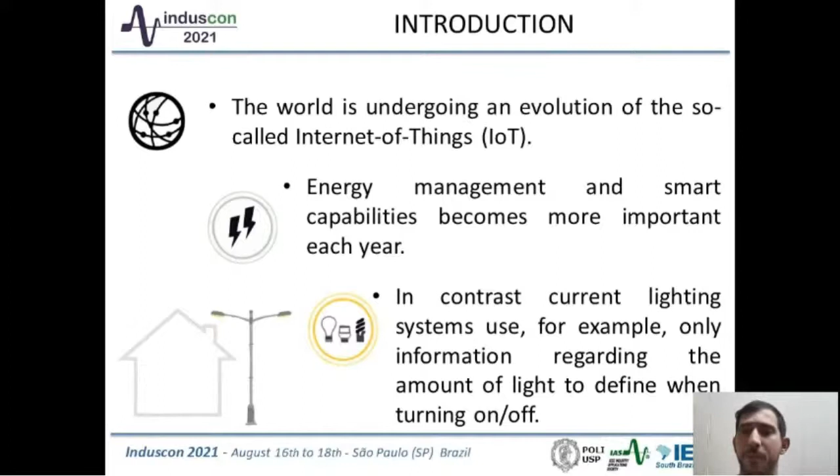In the current scenario, turning on and off public lamps happens based only on the amount of light detected by a sensor. An intelligent system can allow public lighting to implement more complex strategies, such as brightness control. In this work, a low-cost intelligent module to be integrated with public lighting is presented and evaluated from technical and economical standpoints. A low-cost hardware capable of allowing the operation of a single lamppost is presented along with its software implementation. The module will read the environment lighting condition, such as humidity, temperature, and also the current and the voltage from the light bulb.

This information will be used later in the software implementation to determine whether to change brightness from the light bulb.

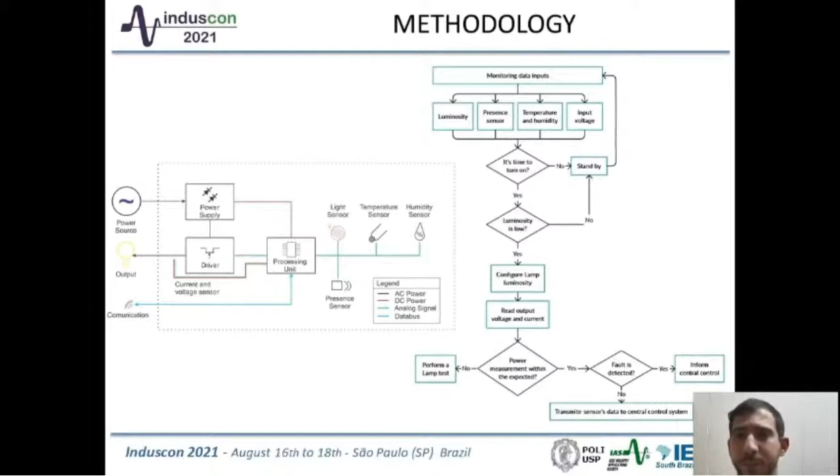Authors evaluate the module feasibility by estimating the maximum amount of power possible that can still provide positive returns.

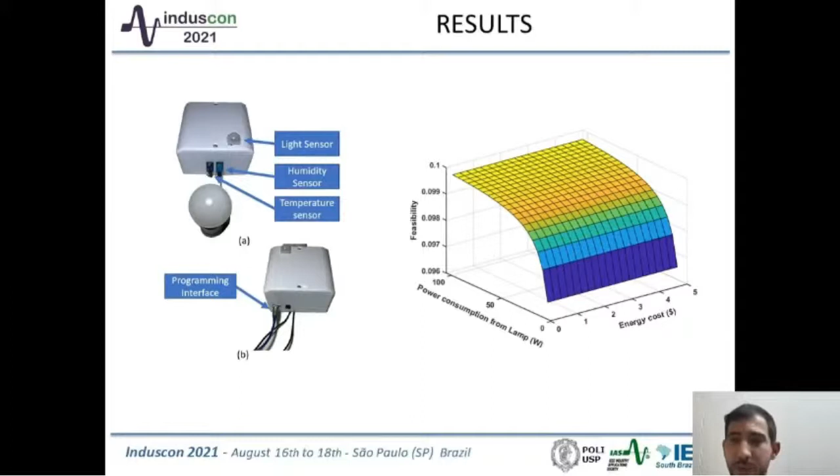The module's economic evaluation was performed based on three parameters: first, considering only the module installation; second, considering the retrofit of the module and the installation of a high-pressure sodium light bulb; and third, the retrofit of a mercury vapor light bulb and the module installation.

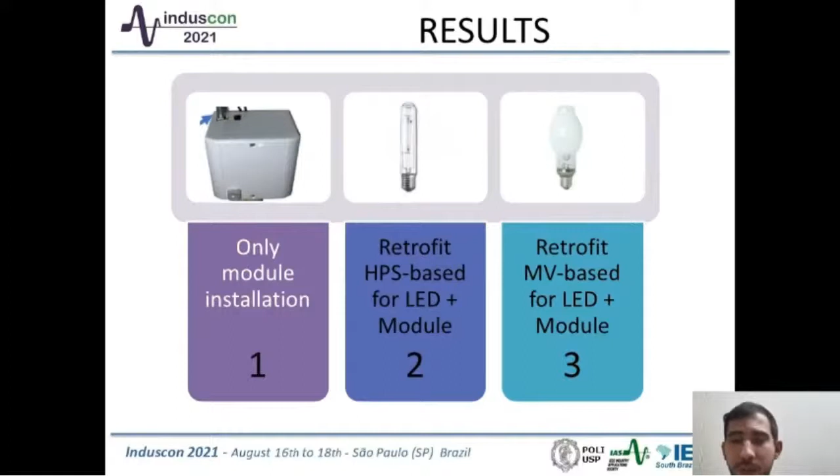Our results have shown viable economic return with a good payback time. These results allow the authors to conclude the module's viability, and in the future, authors intend to evaluate the labor and installation costs, as well as more complex dimming strategies based on pedestrian and vehicle traffic. Authors are available for any doubt, and contact information can be found at the link. Thank you.

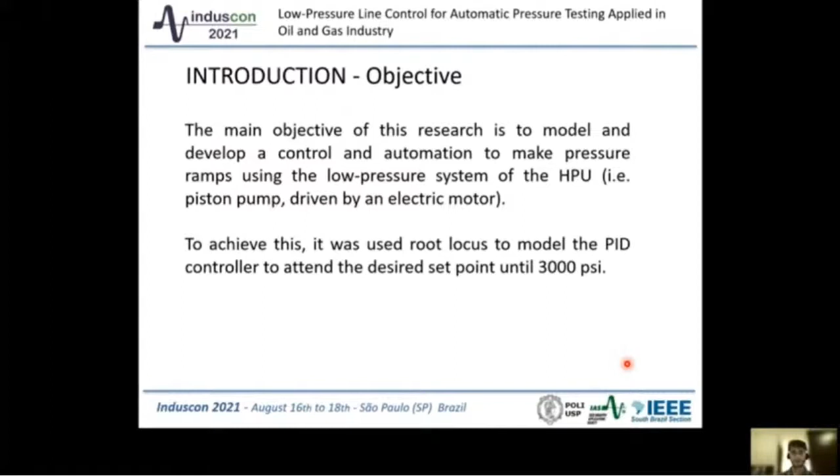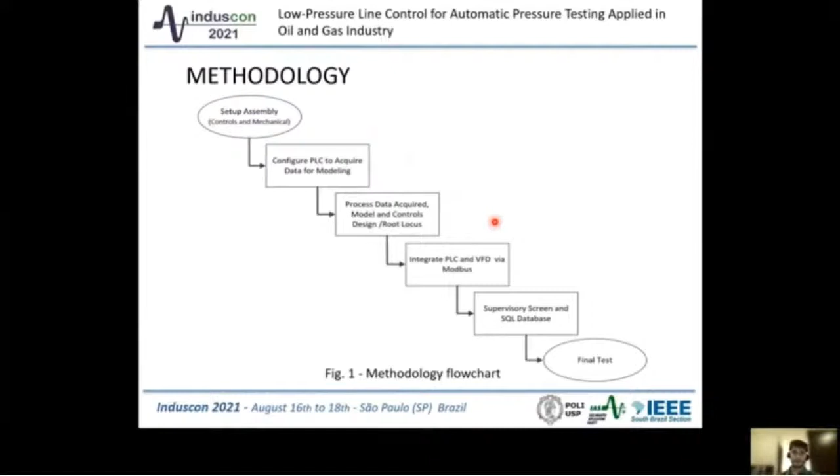To achieve that, we used root locus to model the PID controller. The overall idea is to set up the assembly, mechanical and control parts, understand the system, extract a mathematical model from acquired data, and then configure the PLC, VFD, and supervisor to finally run the final test.

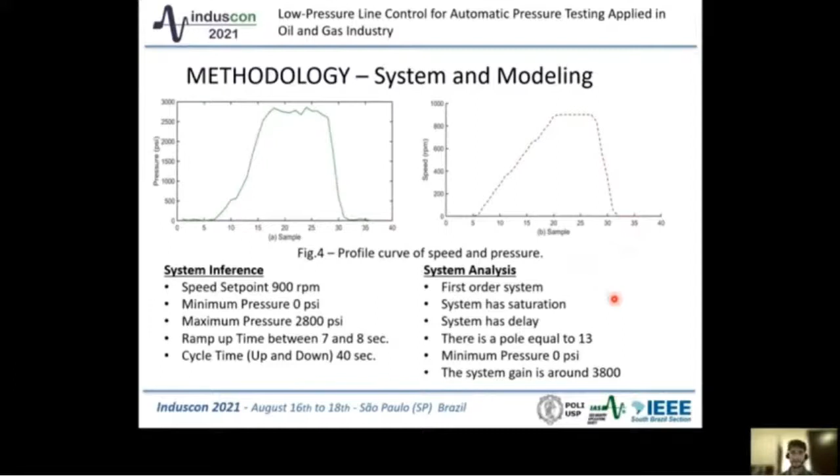In this part, we can see the pre-test to model the system, where we acquired a profile curve for pressure and a profile curve for speed, then made some analysis to understand and conclude some points, such as: it is a first order system, the system has saturation, delay, and some estimated poles and gains.

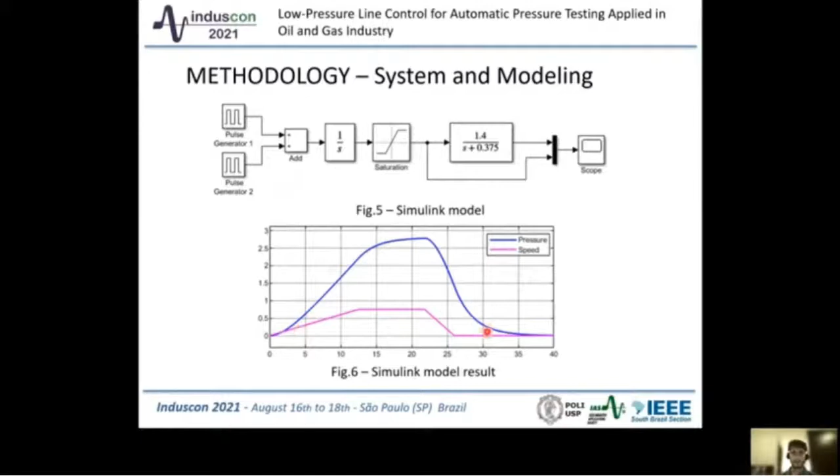After that, we set up and found this transfer function, and built this block diagram to simulate the model and check if the model matches reality. As you can see, the pressure in blue and the speed in purple are very similar to the real system.

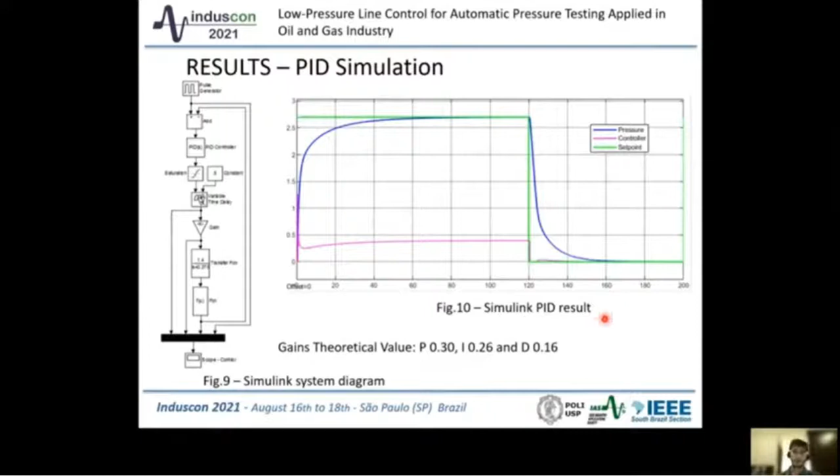During the simulations, to make sure our controller is good enough for the system, we used that model and configured our PID after root locus analysis, with P equals 0.3, I equals 0.26, and D equals 0.16. We have this response with pressure in blue, control signal in purple, and set point in green. It is good enough to be tested in the real system.

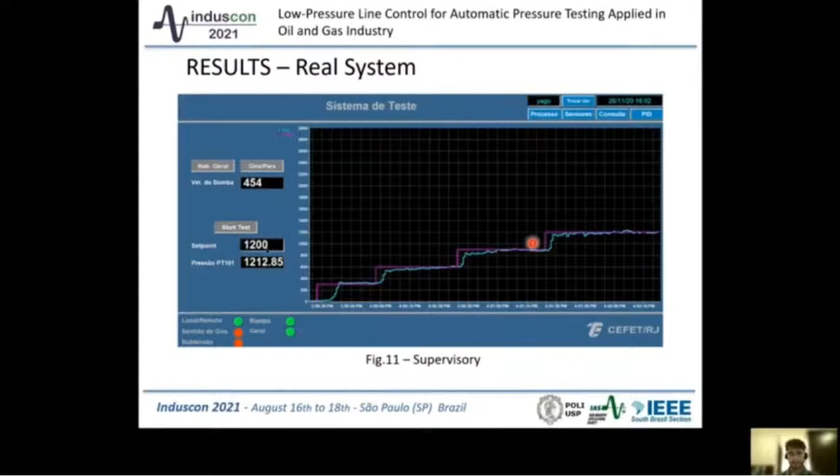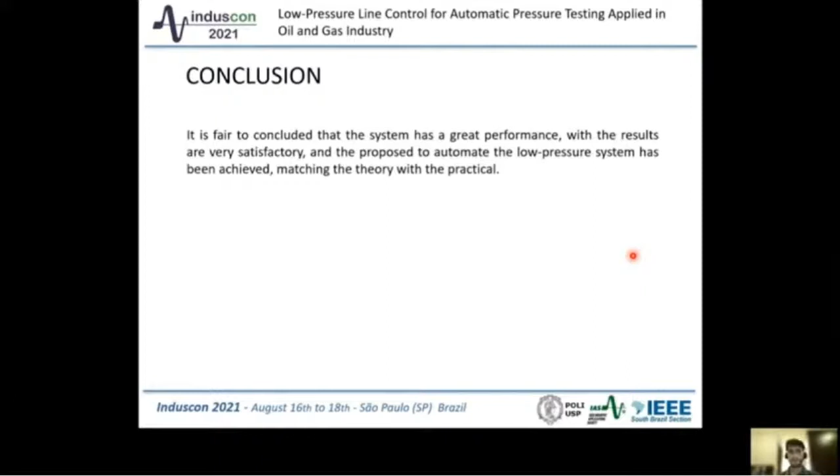It is fair to conclude that the system has great performance, with very satisfactory results, and the proposal to automate the low pressure line has been achieved, matching theory and practice. I would like to thank CEFET-RJ, CAPES, CNPq, and FAPERJ for supporting this work. Thank you all.

The consumption of contemporary society is based on the manufacture of products that need some industrial procedure to be obtained. This need for manufacturing has been present since the beginning of our organized societies, including the manufacture of artisans. The current production of goods and services is driven by phenomena such as demand for customized products, energy efficiency, environmental impact, carbon footprint, and others.

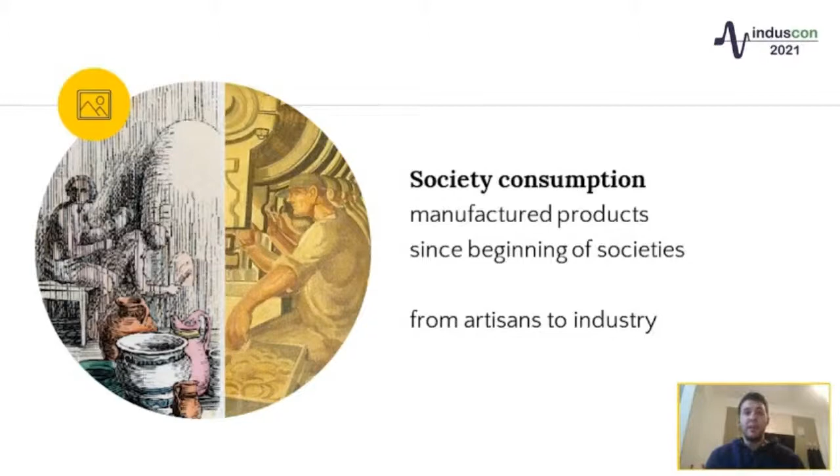In this scenario, Industry 4.0 appears to be spreading a new industrial archetype, marked by a new level of socio-technical interaction. Each small decentralized process in the factory is self-controlled and capable of responding to different situations autonomously.

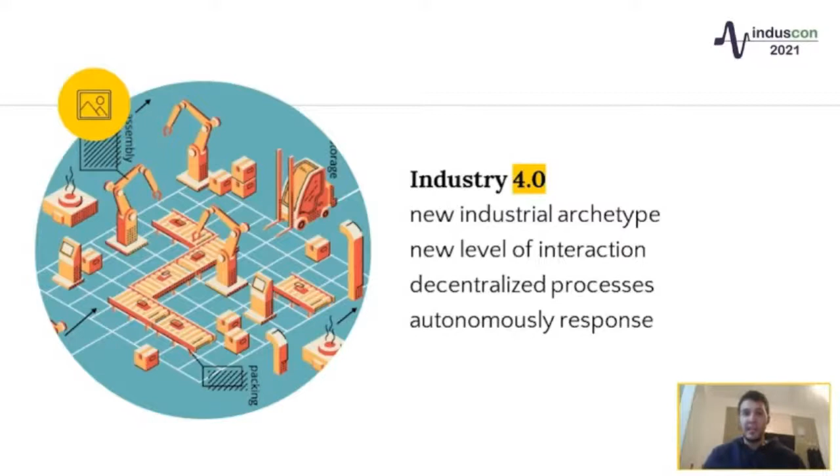This article wants to show a case study of interoperability between AGV systems in a real production line and its corresponding optimization. For the development of this project, research was carried out to understand the automation process of a production line of a large company in the automotive sector, with great performance in the truck industry in Brazil.

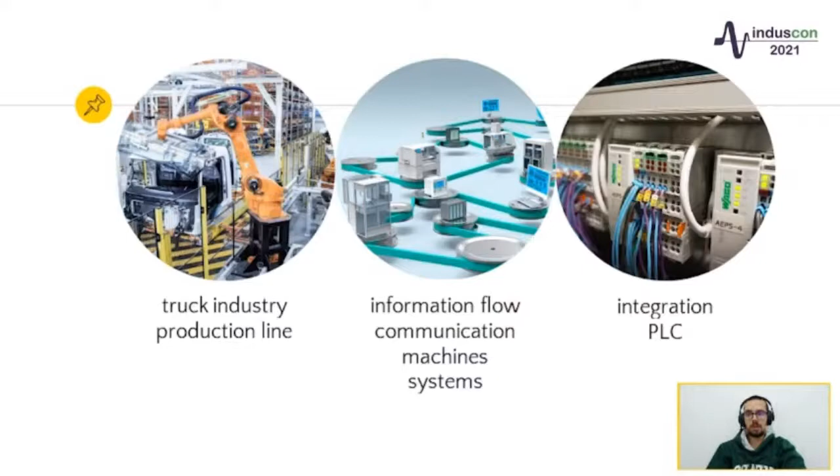The research was aimed at simulating how an integration of autonomous systems would occur within the manufacturing process, in addition to understanding the needs of integrating systems in a production line with several automated systems, identifying how machines communicate and how they can be controlled through databases to perform simulations with the Programmable Logic Controller, or PLC.

Basically, what we did to elaborate this article is that we studied how a real production line works, what kind of systems it needs, and how the information flows into different equipment. We studied the different protocols and different data types that come from different types of machines from different companies, and we tried to put all this together in a virtual simulation environment and make this a tool so that we could study how to integrate all these systems and how it would work in a real-life system.

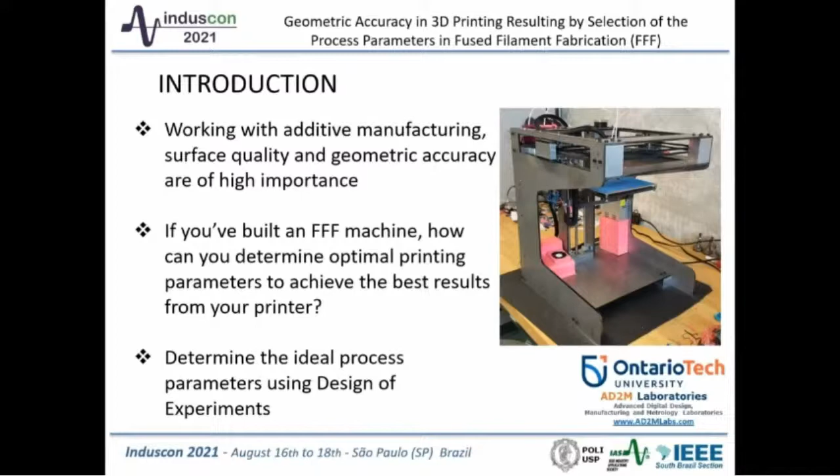So say you have a new 3D printer and you want to improve the surface quality and geometric accuracy of the parts coming off this printer. What's the best way of doing this? One of the ways you could do it, and the way we did it, was using design of experiments.

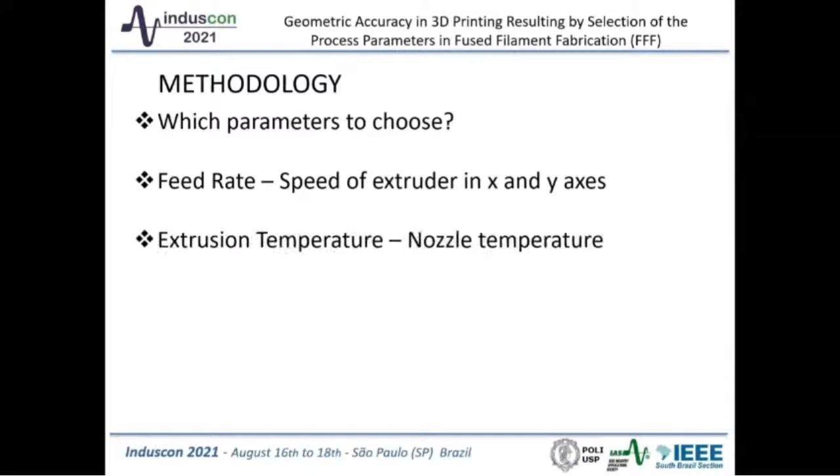So the first thing with this process is, which parameters do you want to modify? So we went with the feed rate, or the speed of the extruder, the extrusion temperature, the layer thickness, the infill, and the flow rate.

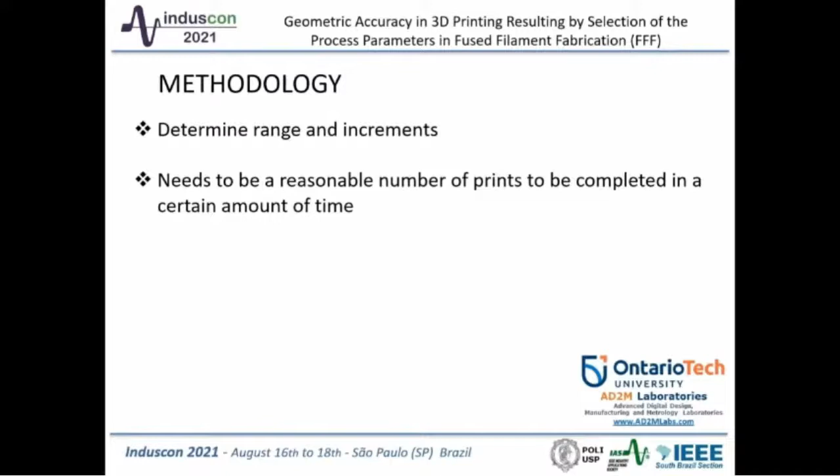Next, we want to figure out what the ranges and increments of these parameters are going to be. We need to make sure that we keep it to a reasonable number of prints, and it needs to be done in a relatively small amount of time. So here are the values we went with.

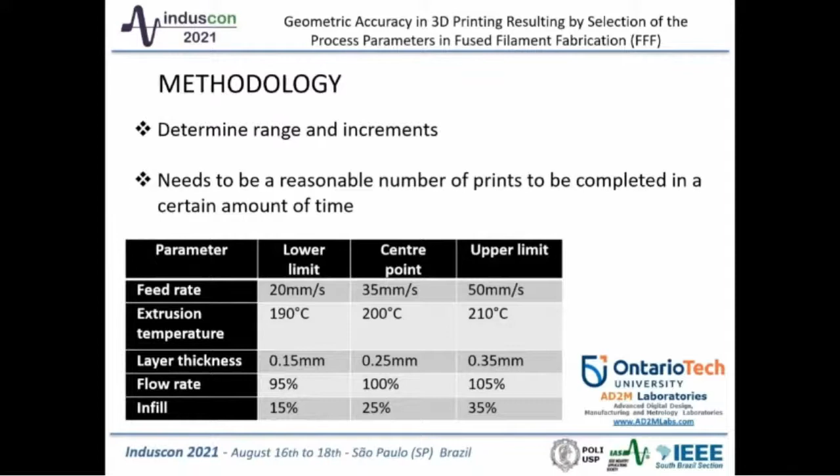We went with a lower limit and an upper limit. So these are going to be the only two values we use for all parameters, and then we're going to go through all permutations of those values. And finally, we have our center point. We're going to run 5 center point runs dispersed throughout the rest of the runs, just as an average point. Those will not be subjected to any permutation.

We also made 3 different test parts. So we have one for linear dimensions, circular dimensions, and angular dimensions.

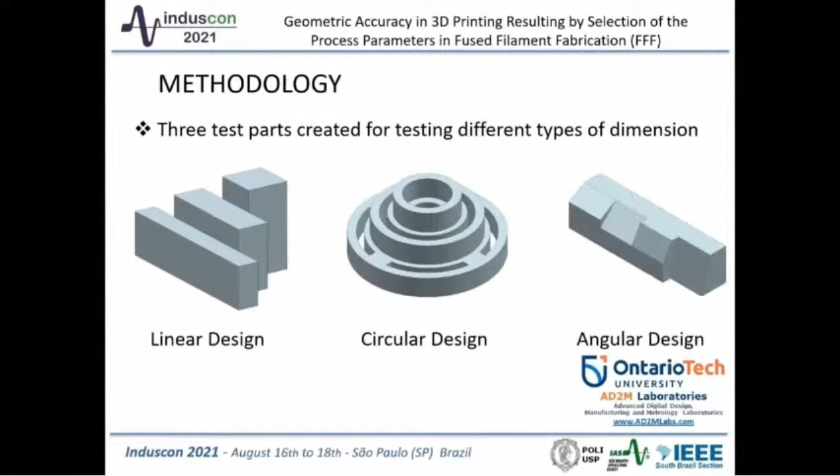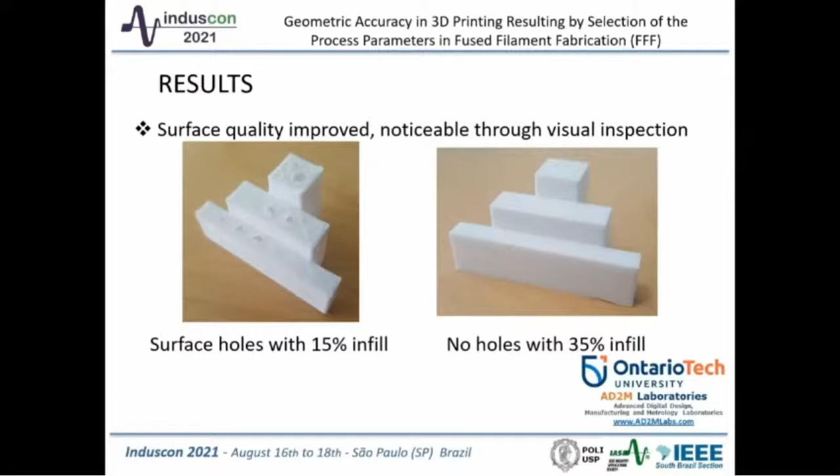So results: after this process, we had much improved surface quality. Just through visual inspection alone, it's very easy to see how improved things are. For example, with our 15% infill, regardless of other properties, we had these surface holes, which is just because the infill wasn't able to support the top layers. By increasing that to 35%, our upper limit, we now have much better top layers, and our surface quality is much better overall.

We also have these unoptimized parts here, which through optimization, we have far superior parts with much less inaccuracy. So before we had an average deviation of 0.35 millimeters for any specific dimension, afterwards a deviation of 0.08 millimeters on average. So a great improvement.

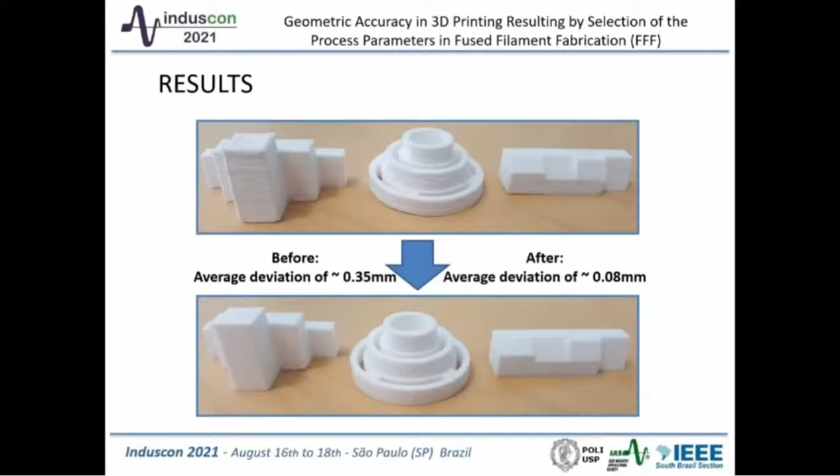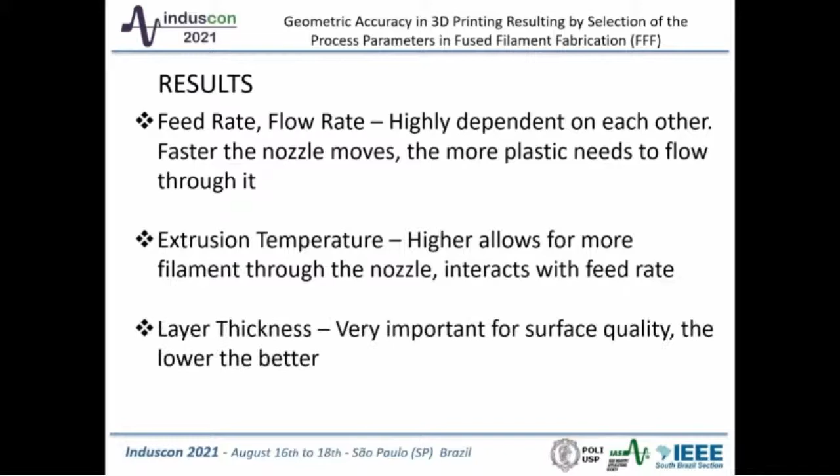Our layer thickness, which is well known, is very important for surface quality. The lower it is, the better, although it takes longer. And finally, the infill directly affects the quality of our top surfaces, as we saw a few slides ago.

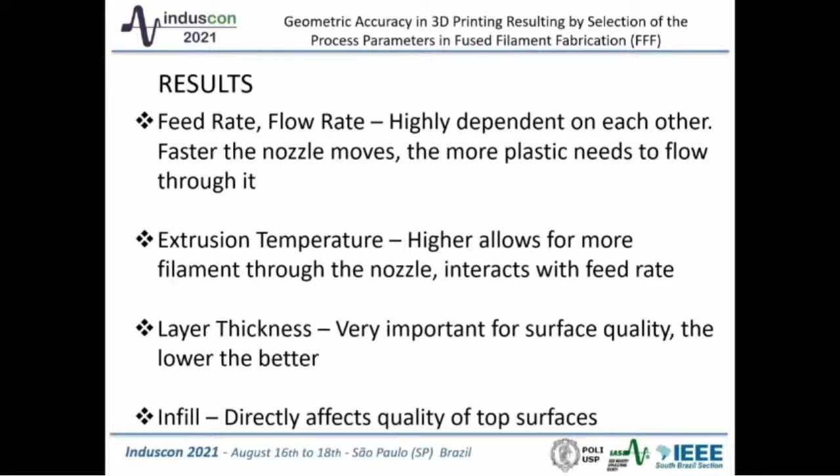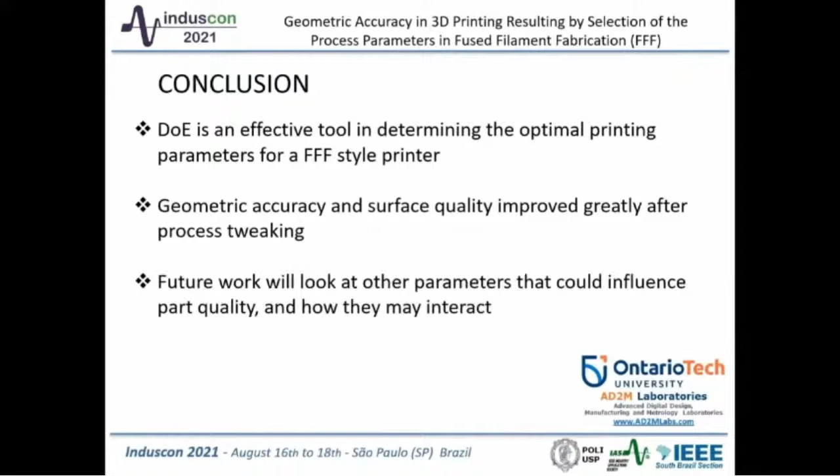So in conclusion, DOE is an effective tool for determining these kinds of parameters. Geometric accuracy and surface quality were improved greatly on our printer after our process tweaks. And in the future, we're going to look at how other parameters could influence part quality and how those may interact. Thank you.

My name is Guilherme Hollweg. I'll present a short presentation of the paper entitled Discrete RMRAC Super-Twisting Sliding Mode Structure for Current Regulation of Single-Phase Grid-Tied Converters with LCL Filter.

The proposed controller is for current regulation of single-phase grid-tied converters with LCL filter. We combine two structures, RMRAC and super-twisting sliding mode, and we obtain results in PSIM, in software simulation, comparing its performance with a proportional resonant controller, a classical controller, and RMRAC with an adaptive first-order sliding mode controller.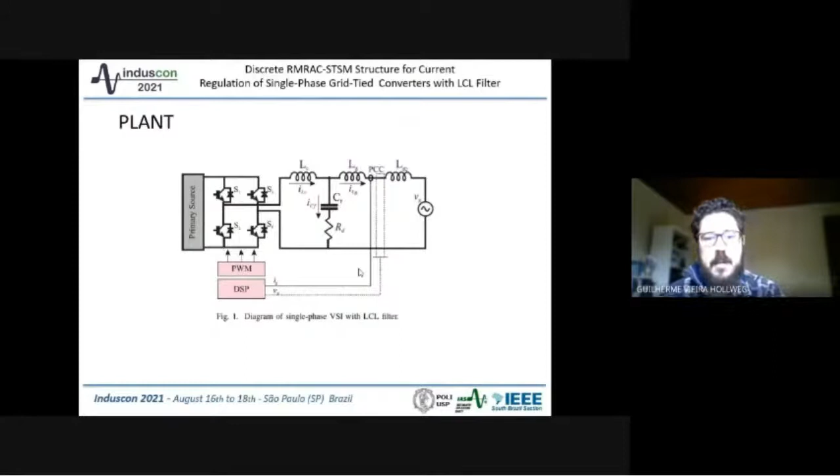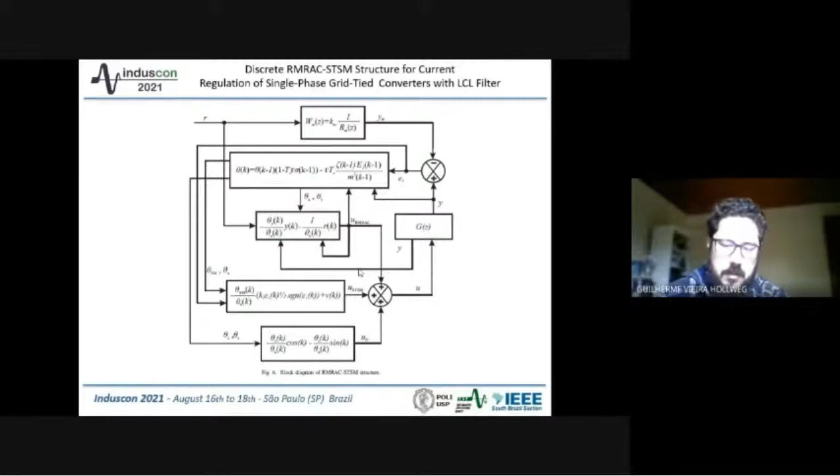This is the plant, LCL single-phase with a voltage source inverter. This is the complete general block diagram with the control signal, the control flow of the system, the proposed controller. We have the model reference, the plant, the recursive algorithm, and the control actions. The complete control action is composed by the sum of RMRAC, super-twisting, and the electrical grid as a periodic disturbance.

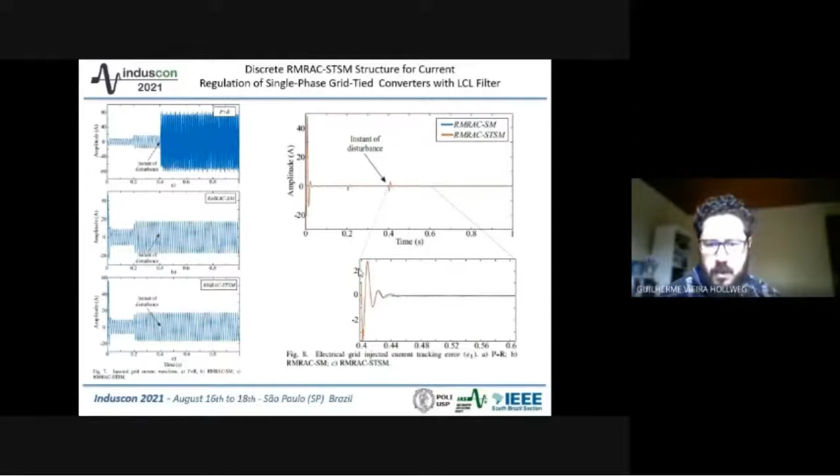We have the results that we compare. In 0.2 seconds, we have a load step from 50% to 100%. In 0.4 seconds, we have the weak grid environment when we add a considerable inductive term in the electrical grid. You can see that the classical controller was not able to keep the system regulated, but the adaptive controllers are able. We have the tracking error comparing the first-order sliding mode RMRAC and the second-order.

We have the augmented error, where we can see that the super-twisting sliding mode presents a lower value of error if we compare with the first-order sliding mode. It occurs because the control action of the super-twisting acts more specifically during the transient regime, tending to zero in the steady state.

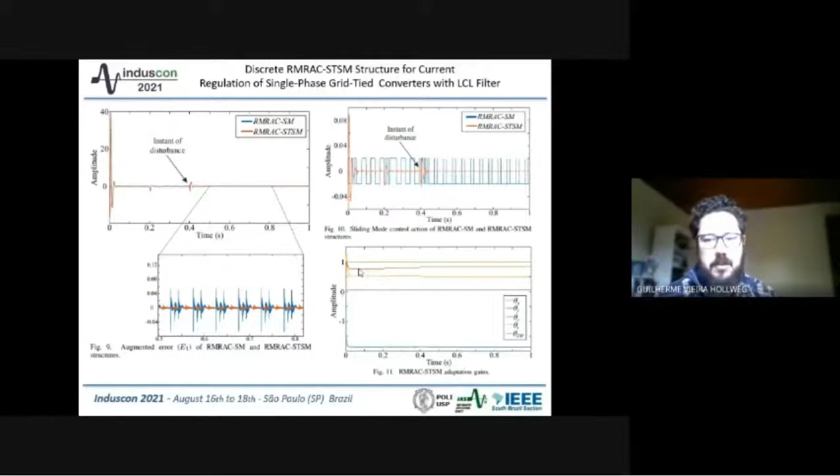The adaptive gains of the proposed structure are disturbed at 0.2 seconds and 0.4, but they converge in steady-state regime. So the proposed controller was able to keep the system regulated with good performance and stable. The classical controller was not able because the parametric variation was too big for it. And we noted a chattering attenuation that is reflected in the tracking error, augmented error, and in the quality of the system.